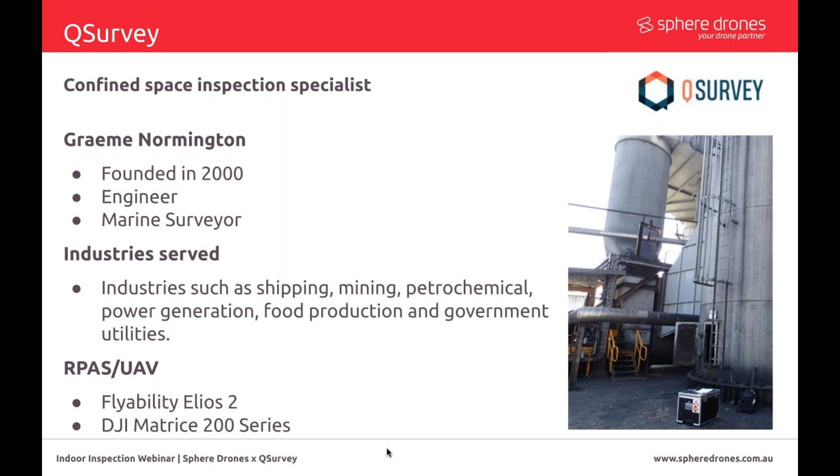And so, Graeme, why don't you just touch on a little bit about how your business has developed over the last few years? You started off with the Flyability Elios 1, you've now got the Elios 2. Can you just talk to some of the assets that you will perform inspections on and what that looks like?

Well, part of our normal business operations in the shipping industry, for example, was climbing into ballast tanks and cofferdams, fuel tanks, anchor chain lockers, and the like. Now, to do that under the old-fashioned way, as I like to say...

We had to prepare those spaces, pre-ventilation, risk assessments, setting up scaffolding and staging in these compartments because they can be quite large, and to get good proper access to view the condition of the coatings and the steel in these compartments, you've got to climb up high and look on the top of the ledges.

Now, it's really difficult. It's quite dangerous, or always has been. And I've been locked in confined spaces twice in my career. Once in the South China Sea for 9 hours on a ship heading south, and again up in Papua New Guinea. So I know the dangers, the hazards, because I've experienced it firsthand.

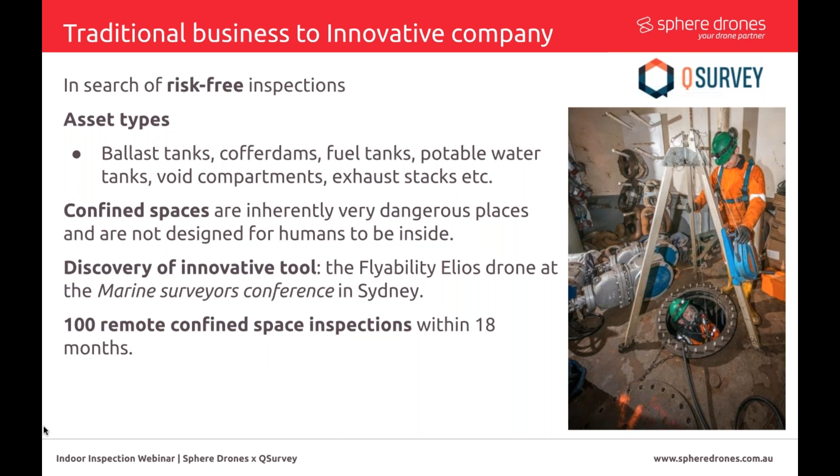So, Graeme, you touched on a little bit about the time that's been reduced by using drones for inspections. Why don't you just give us a run through of what a typical week would look like in preparation for an inspection, and then going through that process of actually doing the inspection?

What we actually do, we plan the following week, the week before, if you will. We don't wait until Monday to see what we're doing for the rest of the week. So we forward plan. We know what assets have to be inspected. We need to know where they're located. We plan for that the week before.

And we contact our clients. We have the person that we need to work with on site. We prefer to work with somebody on site familiar with the asset. They could be seeking particular information as to the internal conditions. So we spend quite a bit of time planning out the job and understanding where it is.

There could be travel involved, there could be air travel, for example. So that's going to entail discharging batteries and having the equipment ready for shipment by air. And we have to make sure that prior to heading out to the job, all our firmware is up to date, everything is in good condition, ready to go.

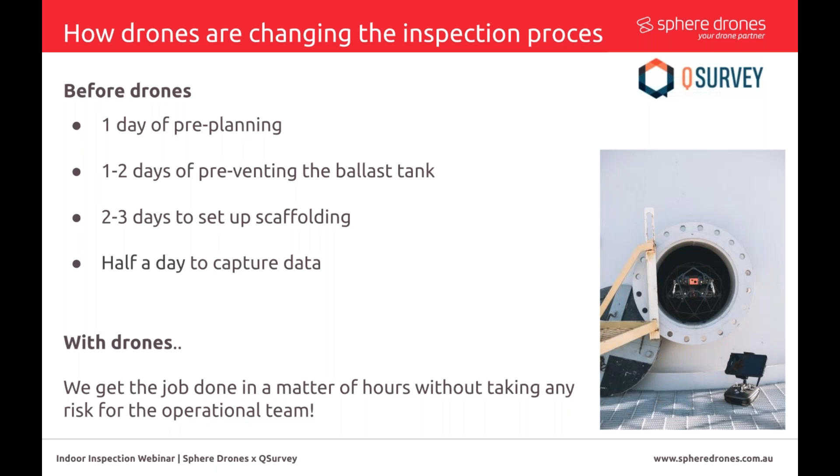Once we finish the job, we pack up and have a debrief with the supervisor or responsible person at the asset. Quite often, if we've got enough time, we'll do the reporting and run through the data with them while we're on site. And then we start all over again. Okay, and just a reminder, guys, if you have any questions at all, please ask them and we will touch on them at the end of the webinar.

So, Graeme, we touched on a few of these points in preparation and planning and being on site. Can you just briefly touch on how your clients have received the Flyability Elios, the Flyability Elios 2, over time?

Well, they love it. As an example, I was carrying out an inspection in Western Australia on a ship, and previously somebody else had tried to inspect this particular asset—you'll see some photographs of this later in the webinar. They hadn't realised the benefits and quality of the videography and photogrammetry data, and they were leaning over our shoulder making comments like, 'This is amazing, we didn't think it would be this good, the quality is fantastic.' This was a very dusty environment, and with the oblique lighting on the Elios 2, it was a real game changer for them and us.

We could see where we were going, and we were getting good information for the client. Without the oblique lighting, we would never have been able to do that. And they're very keen on getting us back again to carry out more inspections.

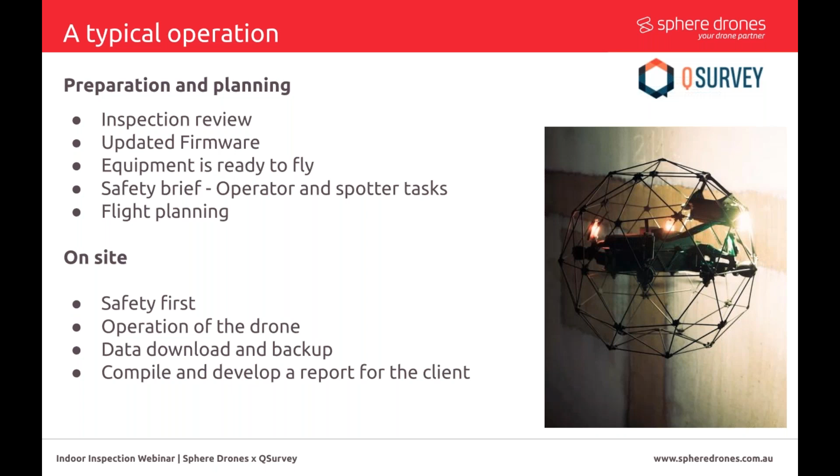Graeme, as a business owner, as someone who's integrated drones into their business, can you just touch on some of the challenges you have faced in becoming operational, and then take us through the benefits?

Probably the biggest challenge, and I don't mean this in a negative way, is getting through the process to be issued with the REOC from CASA. Because we work for high-end clients, and in some cases pretty close to airports—the Sydney shipping terminal is close to Sydney airport, and Cairns is the same, and Brisbane as well—not everywhere you go can you fly the equipment. Our customers want us to be as highly certified as possible, and one of the ways of doing that is being certified with CASA.

So it was a really good learning curve. It took quite a long time because we had to get everything right before we lodged the application. We had some good help and assistance from others in the industry who guided us through this process. It took about 18 months, so that's probably the largest hurdle. There are barriers to overcome, but we overcame them, and people can do that if they want to put in the time and effort.

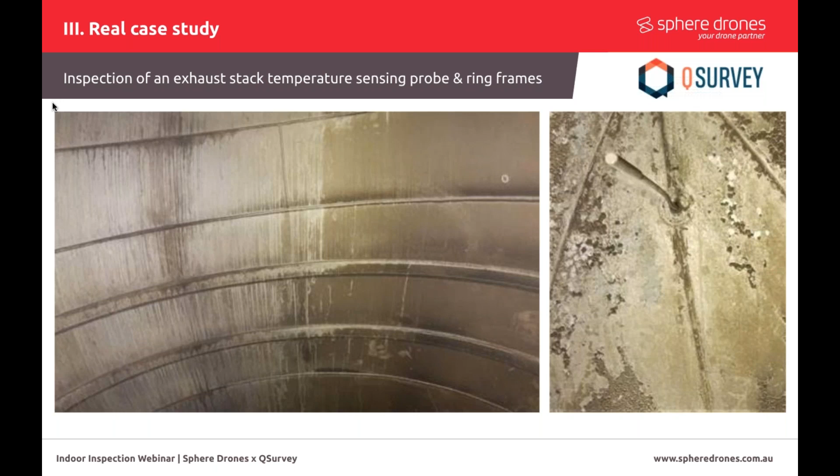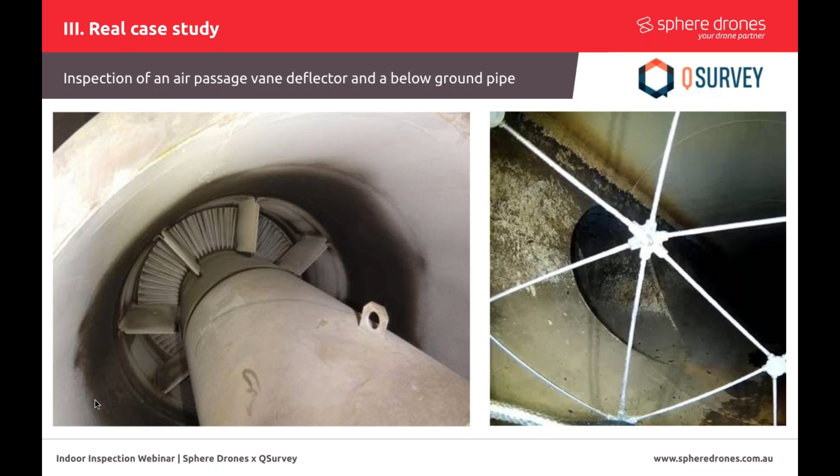Graeme, I might skip these ones for the sake of time, and we'll go through one more case study looking at the Elios 2 data.

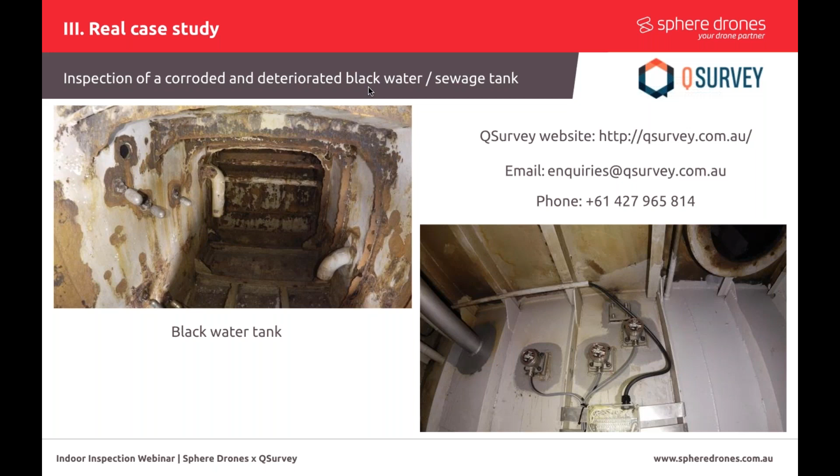I'll start with one question: how can you ensure your remote controller will go through obstacles, say metal objects inside a tank? Well, the steel acts as an antenna. We do have a range extender we use if we have to fly the Elios down into another section of the tank, if it's a long way down and a narrow compartment to get access to the bottom. But what happens is the steel will bounce the signal around. I haven't carried out a formal test, but we haven't had any trouble with losing signal. If you do lose signal, it would more than likely be during an underground inspection or in a concrete pipe or concrete passage. But there is a way to understand and know when you're losing signal, and when to fly back. In steel, that's not a problem for us.

Great. Thanks, Graeme. Another question: when you're on site, is the pilot actually doing the inspection, or is the recording made and then looked at at a later date?